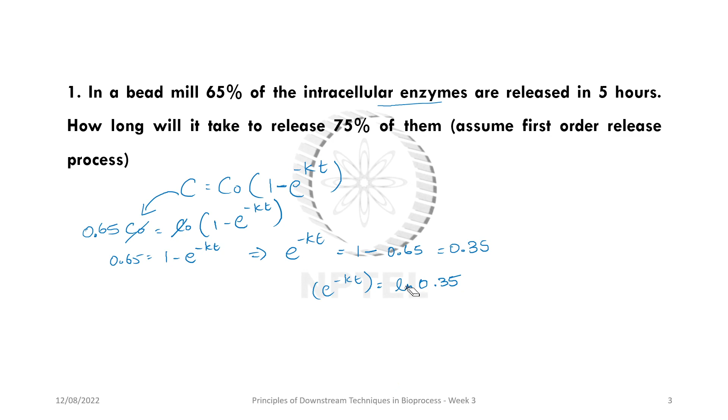So can I cancel these? 0.65 is equal to 1 minus e power minus kt, or e power minus kt is equal to 1 minus 0.65, which is 0.35. So ln of e power minus kt is equal to ln of 0.35, if you're comfortable with ln. So minus kt is equal to ln of 0.35

which is minus 1.0498, and t we know is 5 hours. So k is equal to 1.0498 divided by 5, which is 0.2099. Maybe I can keep it as 0.21, or 0.2 is fine. Hour inverse, is that right?

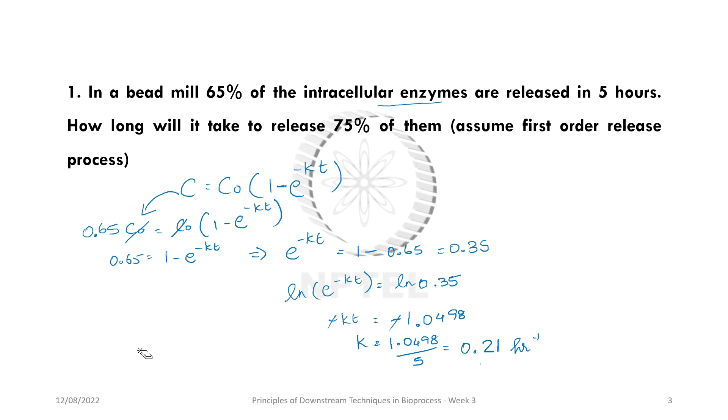Now the second part is, what is the time required for 75% of it to be released? 0.75 C naught is equal to C naught into 1 minus e power minus 0.2 hour inverse into time, which is what we need to find in hours. Once again I can cancel these. 1 minus e power minus 0.2t is equal to 0.75, or 0.25 is equal to e power minus 0.2t. Again ln of 0.25 is equal to minus 0.2t.

Ln of 0.25 is minus 1.386, which is equal to minus 0.2t. t is equal to 1.386 divided by 0.2, which gives me 6.93 hours. Is that right? What do you guys think? If you're getting some other answer, please let me know.

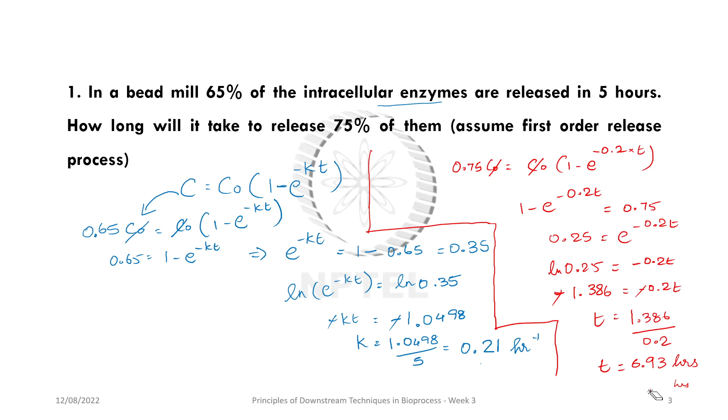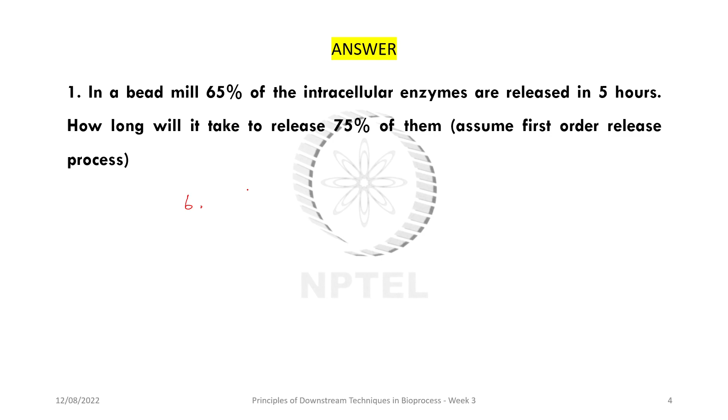I was just wondering if I used log, will it differ? Since you're using log on both sides, if you do the same in the other case also, you end up with 6.68 hours, I think. Ln is good enough. Just wanted to make sure I wasn't making any errors. All right, shall we move on to the second question? Let's write the answer here: 6.93 hours.

Question 2. Protein deactivation as a function of temperature follows first order kinetics with activation energy of 2.5 kilocalories per mole. The protein release rate constant follows an Arrhenius relation such that the constant term is 0.1. All they are trying to tell us here is the Arrhenius constant. If the temperature is 50 degrees Celsius, what is the release rate constant at this temperature? Take a moment to answer this. If you want, I can write the formula here.

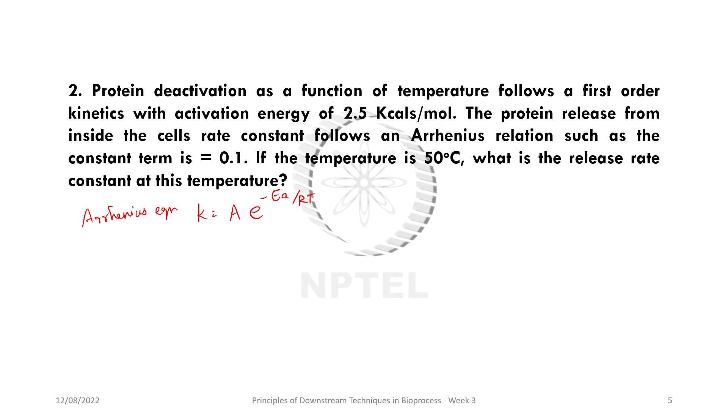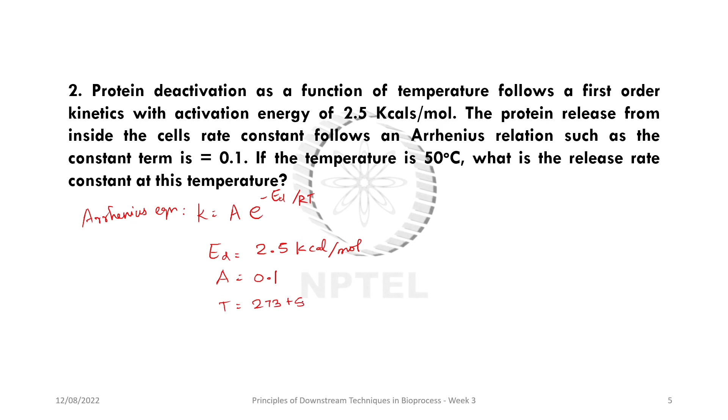This is the Arrhenius equation, right? Instead of activation energy here you will have deactivation energy. So Ed is 2.5 kilocalories per mole. The protein release follows an Arrhenius relation such that A is equal to 0.1. Temperature is equal to 273 plus 50, which is 323 Kelvin. So the units of temperature and energy will depend on what R we are going to use.

So since it's in degrees Celsius, does anybody have an answer? Just substitute these values. What is the release rate constant at this temperature? They're just asking for K. K is equal to 0.1 into e power minus 2.5. Let's do one thing. Great, Sagar Jyoti.

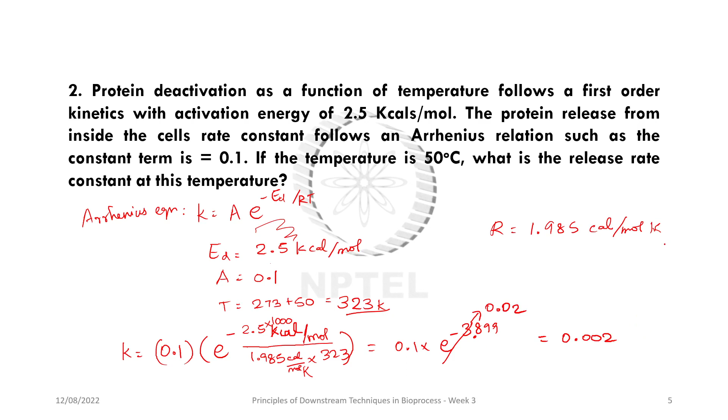Question 3. You are operating a homogenizer at an upstream pressure of 300 bar. You connect two more homogenizers of same capacity in parallel to it, and the upstream pressure now is 190 bar. What is the increase in capacity in percentage after adding two units? Assume other parameters to be same and capacity is proportional to the upstream pressure.

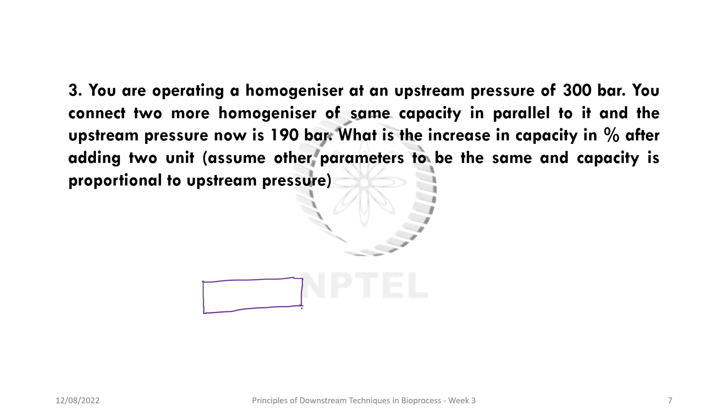So let me put out a diagram for you. You're operating a homogenizer. Let's assume this is the homogenizer. So initially the upstream pressure is 300 bar, and then you're adding two more homogenizers in parallel. In parallel. Now the pressure has changed to 190 bar. So what is the increase in capacity in percentage after adding two units? Assume other parameters to be the same, and the capacity is proportional to upstream pressure.

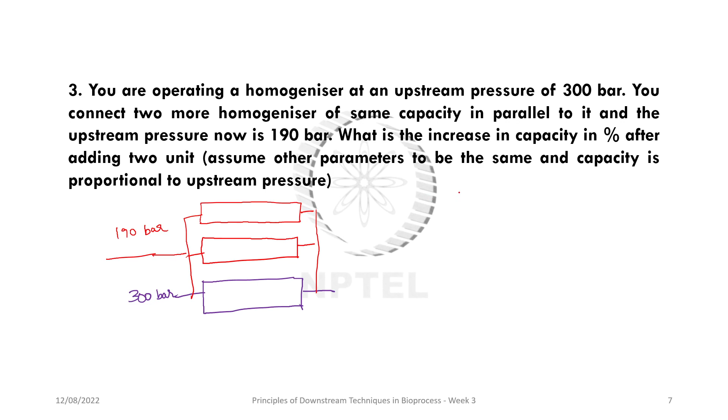So does anybody have an answer, or shall I go ahead and solve this? Okay, I'm taking that as a go ahead. So we know that the throughput, the output is proportional to the pressure. So there's a proportionality constant here, but when we are comparing two scenarios, you can omit that part. So Q1 by Q2 is equal to P1 by P2, right? So since I'm going to have Q2 as my unknown, I'd like to flip this equation as Q2 by Q1 is equal to P2 by P1.

And I know that P2 by P1 is, second pressure is 190 into 3, because we have 3 homogenizers here, right? Divided by the first pressure, upstream pressure in the first case is 300. Is that okay? So I can cancel 3 here and 3 here, so that leaves 190 by 100. So moving 2 decimals, I would have 1.9. So Q2 is 1.9 times of Q1. So what does that mean? It is 1 plus 0.9 Q1, or there is a 0.9 times increase.

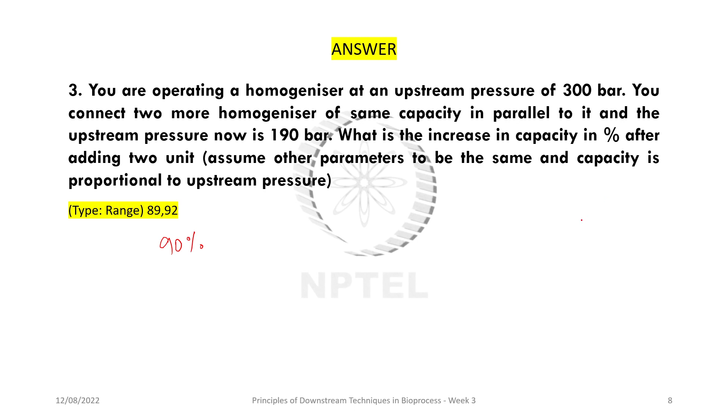In percentage, since they've asked the answer in percentage, that will be 90% increase. Agreed? If it was 2, it is twice, which is a 100% increase. So since this is 1.9, if you omit the first 100, it will be a 90% increase. Right? Sounds fine? So we have our answer as 90%. Okay. Shall I move to the next question?

Question 5. Solids A and B have compressibility factors of 0.8 and 0.3 respectively, but the ease of filtration is the same in both the cases at the same pressure. If the pressure of filtration is doubled, which one will filter faster? Solids A and B have compressibility factors 0.8 for A and 0.3 for B, but the ease of filtration is the same. Is that right? Yeah, let's take a minute. The ease of filtration is the same in both cases, or the resistance is the same, so the ease of filtration is also same. Correct?

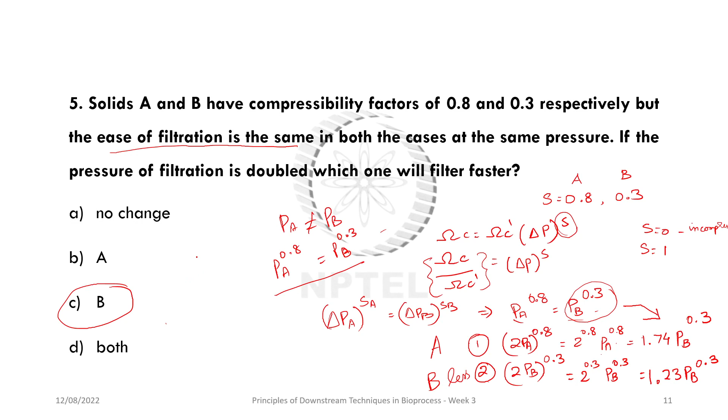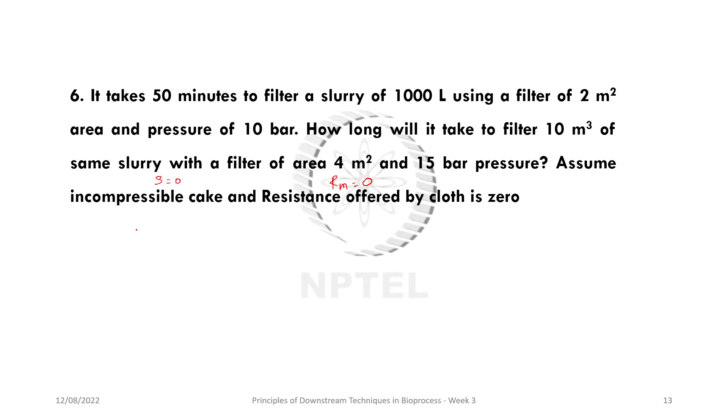Right? Since they have not given us any information except for time, volume, and filter area, and pressure. Right? So this one's there, area is there, volume is there. All other components are not known. Right? So let's bring the useful variables, including this constant we are going to throw out. So T into A square delta P divided by V square, right, is constant.

So what can I do? How long will it take? So T2 is the question. Let's write the known and unknown for case 1 and 2. Case 1, you have time is equal to 50 minutes. Slurry volume is equal to 1000 liters. Since the next one is going to be in meter cube, I'm going to convert this as 1 meter cube. Filter area is 2 meter square and pressure is 10 bar.

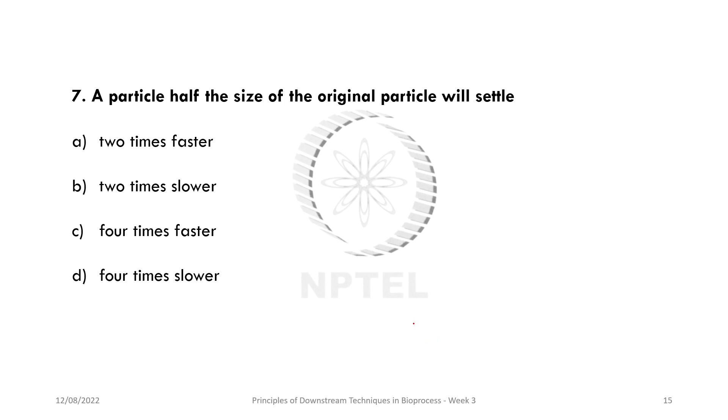Question 7. A particle half the size of the original particle will settle 2 times faster, 2 times slower, 4 times faster, 4 times slower. So we are talking about settling here. What formula do we have for settling? V is equal to d square by 18 mu into rho solid minus rho liquid into g, since we assume it is gravitational settling.

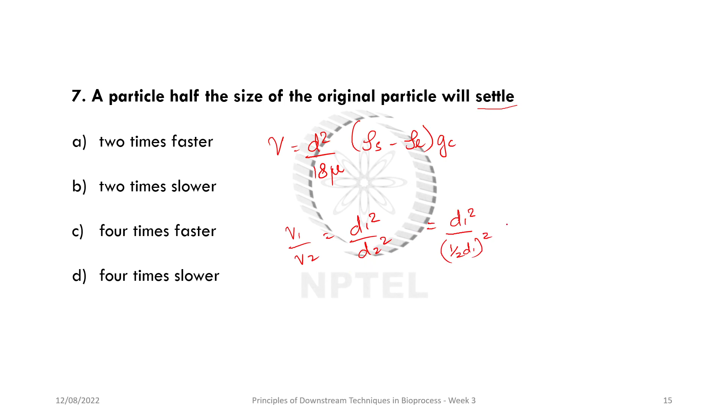So you have d square here and the velocity on this side. So v1 by v2 is equal to d1 square by d2 square, and d2 is half of d1, right? Is equal to d1 square by half of d1 the whole square. What does that give us? d1 square divided by 1 by 4 d1 square, because I'm squaring half here. That will go to the numerator as 4 d1 square by d1 square. I can cut these. v1 by v2 is equal to 4,

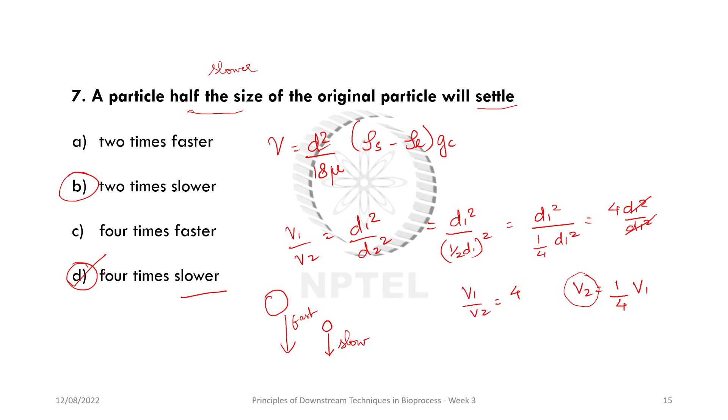which means v2 is 1 by 4th of v1. Agreed? This is the new velocity we are talking about. So it is 4 times slower, right? The bigger the particle, the faster it will settle. The smaller the particle, the slower it will settle. Correct? So the particle half the size is actually going to be slower. So that gives you only two options. But since you have a square here, it is going to be 4 and not 2. Agreeable?

Okay, let's go to question 8. If I use a bowl centrifuge to separate the solids from slurry, the throughput of the centrifuge for 2 centimeter diameter particles when compared to 1 centimeter diameter particles will be, again it's the same question. The throughput of the centrifuge is a function of the velocity as well as particle size. The velocity is again a function of particle size. So v by d the whole square.

Correct? Now the question is for 2 centimeter diameter particles. So that is your d2. d2 is equal to 2 centimeter whole square. And how is v2 changing with respect to the initial case, when compared to 1 centimeter diameter? So d1 I'm taking as 1 centimeter, with v1. So you will follow the same process. v2 by v1 is equal to 4. Clear? Previously I had mismatched v1 with d1's value and d2 with v1's value. So the first case is your throughput for 1 centimeter dia, where d1 is equal to 1 centimeter, and how is v2 changing with respect to v1 when d2 is equal to 2 centimeters? So is it agreeable?

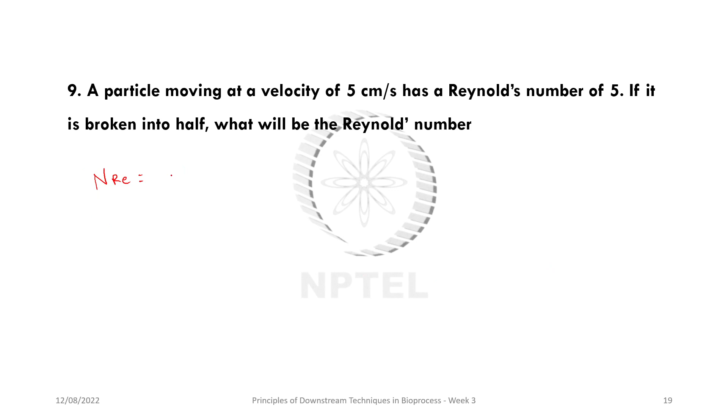So it goes up by a factor of 4 because V2 is 4 times V1, right? A particle moving at a velocity of 5 centimeters per second has a Reynolds number of 5. If it is broken into half, what will be the Reynolds number? What is Reynolds number? dv rho by mu. And they have given you velocity is equal to 5 centimeters per second. Nre is equal to 5.

So let's take Nre2 is equal to d2 v2 rho 2 by mu 2 divided by Nre1, d1 v1 rho 1 by mu 1. So that would give us d2 v2 rho 2 by d1 v1 rho 1 into mu 1 by mu 2. Are we clear? There is no change in viscosity. If it is broken into half, there is only change in d. And we don't know about velocity still. Density is not changing. Viscosity is not changing.

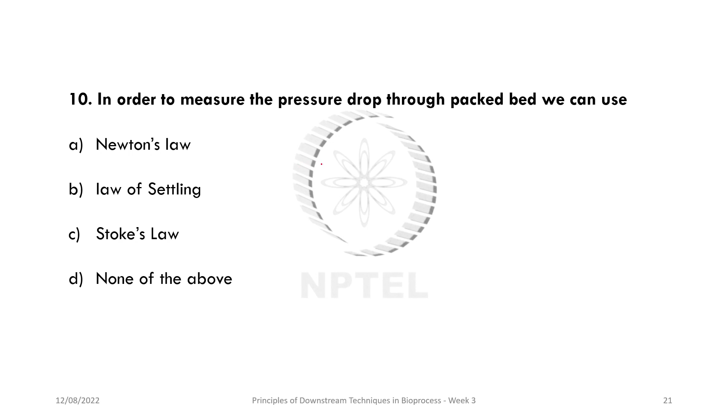Going ahead. In order to measure the pressure drop through packed bed, we can use Newton's law, law of settling, Stokes' law, none of the above. So I'll just directly display the answer because there's nothing to explain here. Okay.